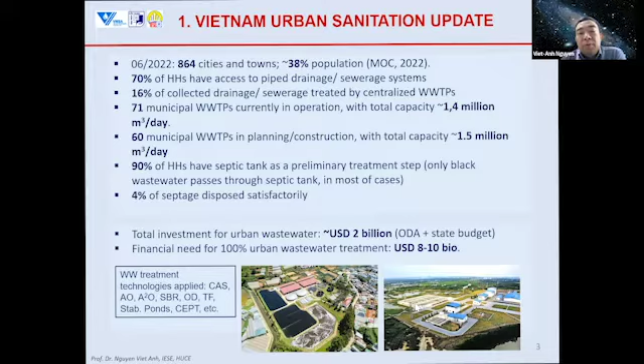There are different wastewater treatment plants in Vietnamese cities. Most systems are combined, except the sanitation systems in new urban areas and in some selected cities.

Combined and separate systems are very different in setting, and in the separate system, we can avoid septic tanks and eliminate the fecal sludge problem.

But in some urban areas, even new urban areas, people still have the custom of using septic tanks even in separate systems. There are some challenges in urban sanitation.

The key challenges are urban flooding, especially in this rainy season, sanitation coverage, and source of funding. Now we have less and less ODA for wastewater projects.

Cost recovery is a challenge, as in many other countries, especially developing countries. The household connection is a very important component, and it is being more and more considered, taking experience from the past. The last challenge is fecal sludge management.

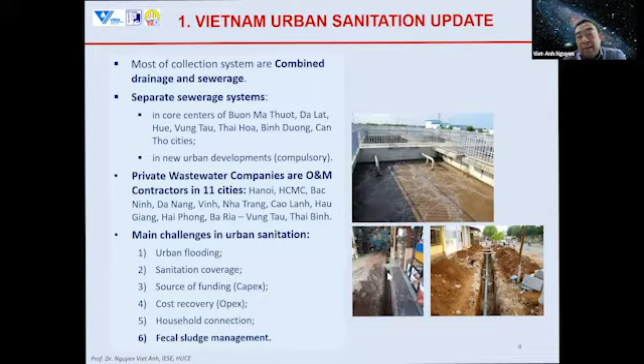This is a scheme of the combined sewage system in existing urban areas, where we have a septic tank receiving black wastewater, and from time to time we empty the tanks using vacuum trucks to the treatment site.

That is the combined sewage system. In the separate system, you see the connection directly, with sewer lines going to the sanitary waste.

Of course, we have to deal with every household, break the floor, and get wastewater to the junction box in front of the house.

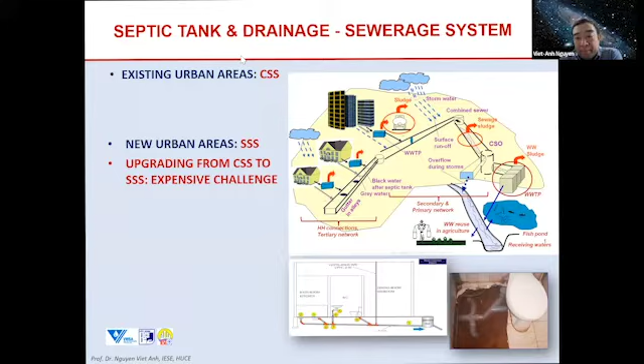This is an SFD for Hanoi City, where you see the red arrows showing a big value of untreated wastewater and fecal sludge dumped without treatment. This was done a few years ago, but the picture is still similar.

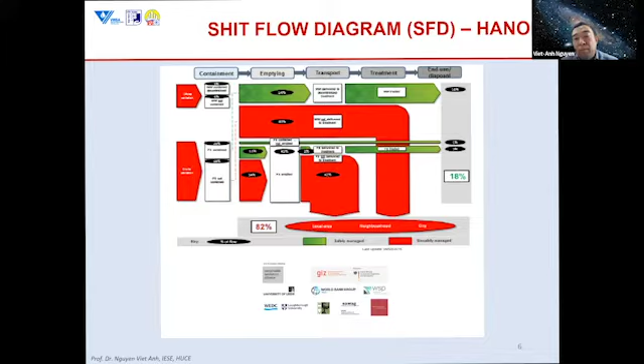So our mission is to make these red arrows smaller and to utilize the available resources from these lines.

Talking about the water and wastewater tariffs, we still have fairly low water tariffs, and wastewater tariff is only 10 to 25% of the water bill, covering only part of operation and maintenance expenditures. The rest should be subsidized by the city budget, and this affects fecal sludge activities in the cities.

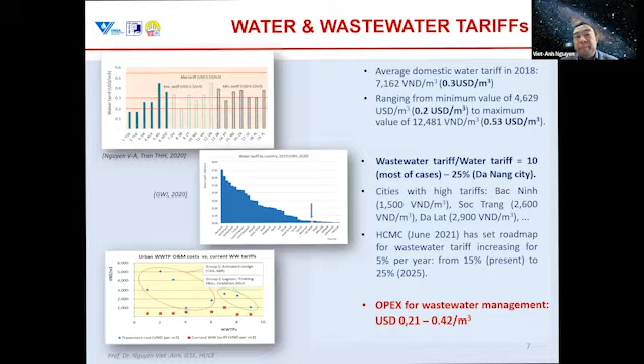Talking about the septic tank, the most common facility in urban areas. They can be made from bricks, plastics, FRP, or concrete; bricks and concrete are very common. Because space is very limited in cities, most septic tanks are built in the basement or behind the house where there is a garden.

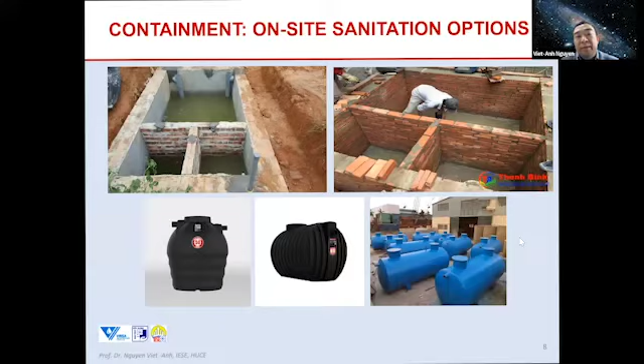We understand the legal framework for fecal sludge management is very important. In 2014, the government issued a decree on drainage, sewage, and wastewater treatment, with special articles on sludge and fecal sludge management that encourage resource recovery. The new environment law in 2020 also takes fecal sludge seriously, requiring it to be properly collected and treated, classifying it as hazardous waste.

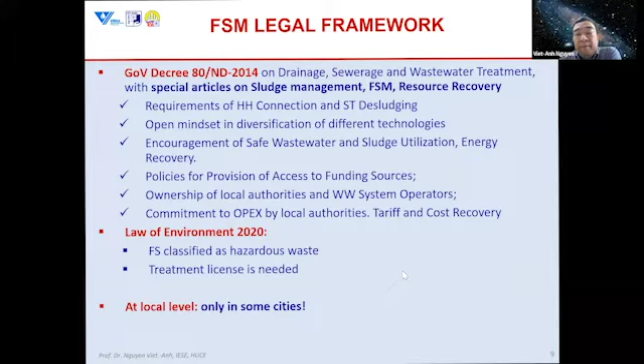For hazardous waste, only companies with a treatment license can provide this service. This is at the central level. At the local level, only some cities have local regulations specifically on fecal sludge management. I will mention that later.

For utilization, we have some technical standards setting requirements for the quality of compost product, including compost made from fecal sludge, regarding heavy metals and pathogens.

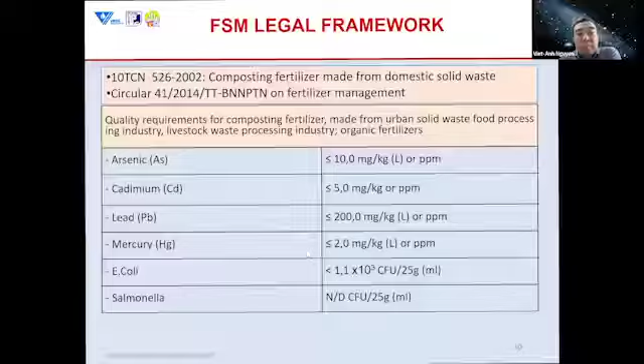Now there are some options we are applying for fecal sludge treatment. First is co-composting. This is a co-composting station in Hanoi, where solid waste from markets is brought to the station and fecal sludge is co-composted together. This is a product after maturation, used for industrial plantation.

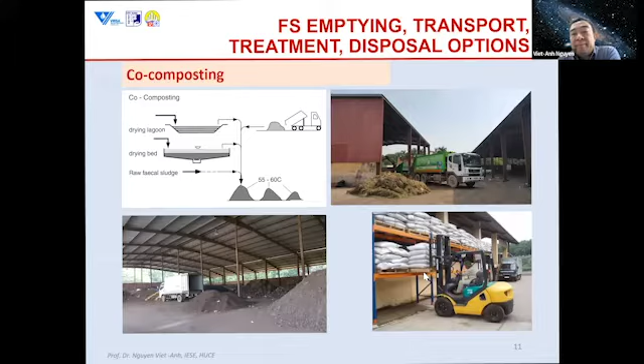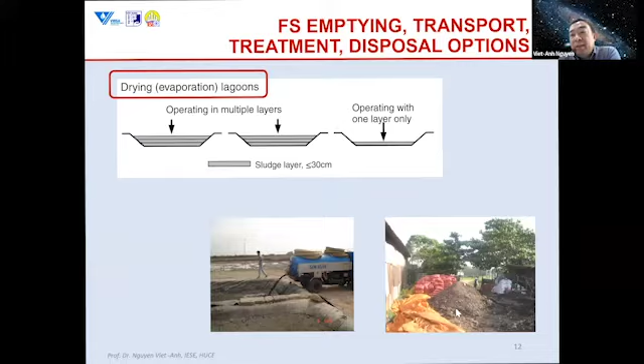The second option is drying lagoons. This is in Ho Chi Minh City, a private company that provides the service of emptying, transportation, and disposal. They rent land in the solid waste landfill complex, where they have drying lagoons, and the dry sludge is sent as material for composting.

Another option is drying beds. In most cases these are built together with wastewater or landfill projects. This is in Quang Ninh, near Hạ Long Bay, a drying bed especially built for fecal sludge, with a receiving station. These beds can also receive sludge from the nearby activated sludge plant.

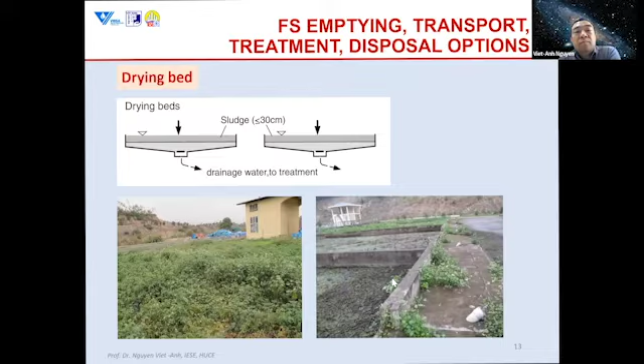In Haiphong City, we have a stabilization pond. After treatment in the stabilization ponds, the fecal sludge is mixed with organic waste again for composting. This station was built under a World Bank project about 15 years ago and is still under operation.

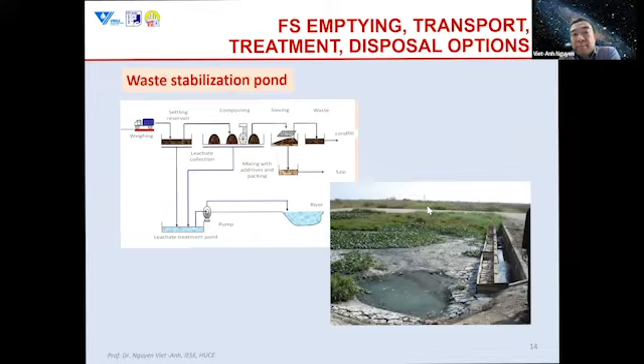We start to consider mechanical dewatering, besides conventional machines like filter press or screw dewatering machines. Now we have this multi-disc sludge dewatering machine, which works quite efficiently. This is dry sludge—because fecal sludge contains a lot of water and is difficult to dewater, you need to add a lot of cationic polymer, which increases cost, but you get less than 75% humidity, the water content in the dewatered sludge.

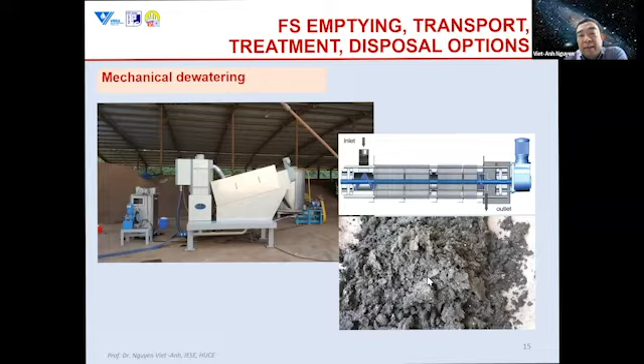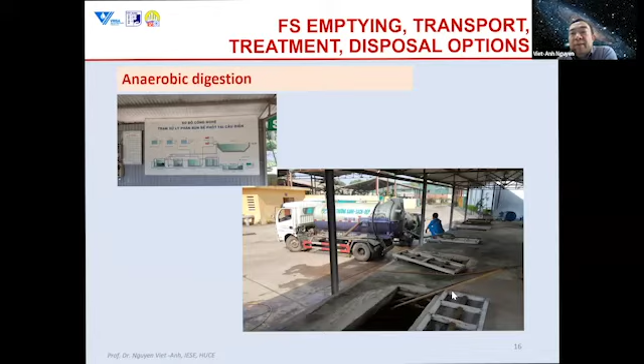Another option is anaerobic digestion. This is in Hanoi City, where septic tank sludge from public toilets is brought here by the city urban environment company, Urenco, and stored before being sent to the UASB. The liquid phase is further sent to the stabilization pond, and the solid phase is sent to co-composting.

In cities with wastewater treatment plants, fecal sludge can be treated together either with wastewater or with sludge generated from the sewage treatment plant. This is Buôn Mê Thuột and Đà Lạt city, where fecal sludge is brought into the receiving chamber, and in Buôn Mê Thuột it is treated together with wastewater.

The challenge for this option: even though it doesn't bring much organic loading to the wastewater treatment plant, it brings very high nitrogen ammonia loading. When septic tank sludge receives only black wastewater, there is very high nitrogen ammonia concentration in the fecal sludge, and if the sewage treatment plant cannot handle the nitrogen in the effluent, it cannot meet the standard. That is one challenge we have to be aware of.

In Buôn Mê Thuột city, they use waste stabilization ponds technology for wastewater treatment, and ponds have limited capacity for nitrogen removal. That's why in the second phase of the plant upgrading, they have to consider the AO process for better nitrogen removal. Similar situation in Đà Lạt city.

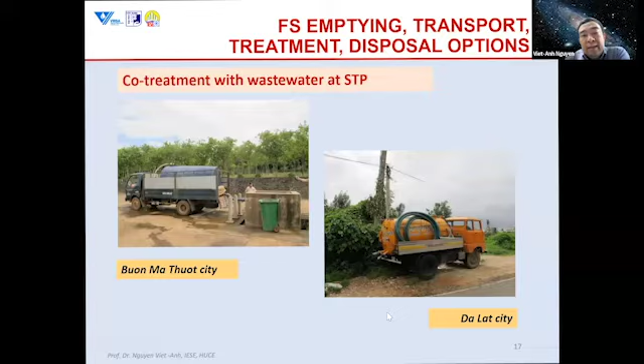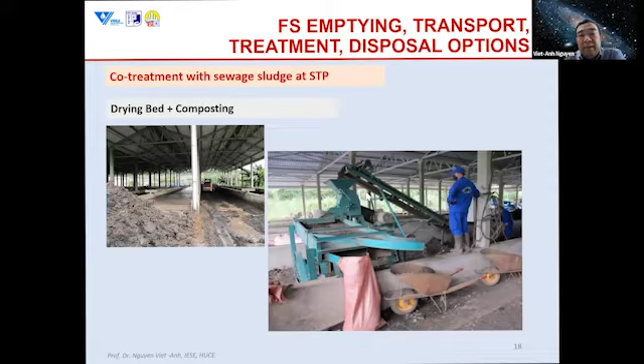In Đà Lạt city, this treatment plant can sell the co-compost product to the flower farms. There are a lot of flower farms, and there is a need in the market for fertilizer. We did a study a few years ago on the market demand to see how we can make use of a value chain in fecal sludge.

We conducted a study in some provinces: Sơn La, Bắc Ninh, and Bà Rịa Vũng Tàu, and found there are more than 10 options for utilization of nutrients from fecal sludge. But the most feasible options in these three studied cities are fertilizers, fuels for brick production, black soldier fly larva for aquaculture, and again, solid fuel for brick production.

So locally made brick workshops can receive the fecal sludge as fuel.

The treatment plant in Hanoi is under upgrading, and the city is calling the private sector to take part. The station will be upgraded from 50 to 500 cubic meters per day, which is pretty enough for the amount of fecal sludge generated from the city. Now it can handle only 10%.

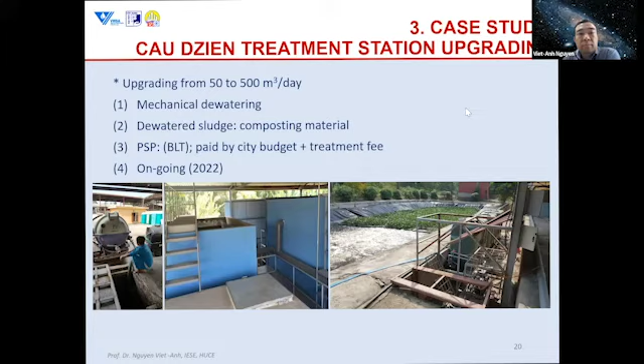This is an FSM project in Bến Tre carried out by East Meets West Foundation. This is a quite interesting project. The foundation works a lot with local authorities and involves a lot of stakeholders, including the city authority.

Also involved are the public utility urban environment company Urenco, and private firms for collection and transportation, the women's union who work with households on septic tank utilization, and working also directly with households.

The treatment station includes settling and drying beds mostly, and then leachate is sent to the treatment station. There are two special trucks, big and small, for fecal sludge collection in the city. This is the drying bed, and the leachate is treated here, and then sent to the waste stabilization pond.

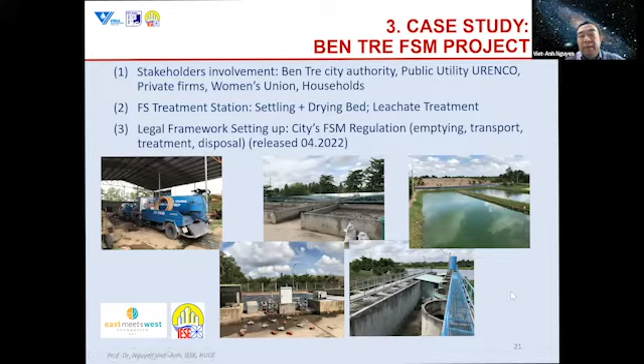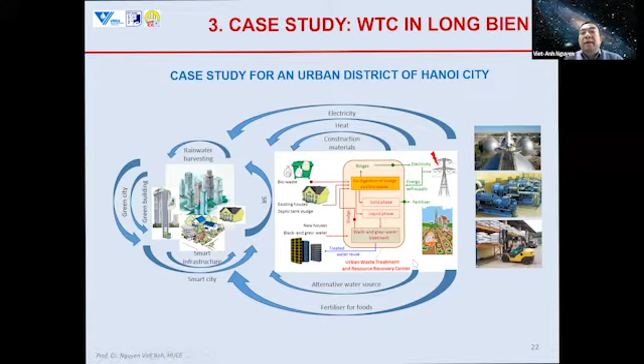Another recent study we did looked at the possibility to recover resources from integrated waste management in the city. We call it a green city, where bio-waste, septic tank sludge, and wastewater can be treated together at the integrated waste treatment station of the city, where recovered energy can be utilized, and wastewater and fertilizer and so on can be utilized for the city.

Our findings show that for one person per year, fecal sludge generated can create 1.5 kilowatt-hours. Besides wastewater, the embodied chemical energy can generate 15 kilowatt-hours per person, and organic waste 159 kilowatt-hours per person per year. We are not talking about heat, only about the electricity generation potential.

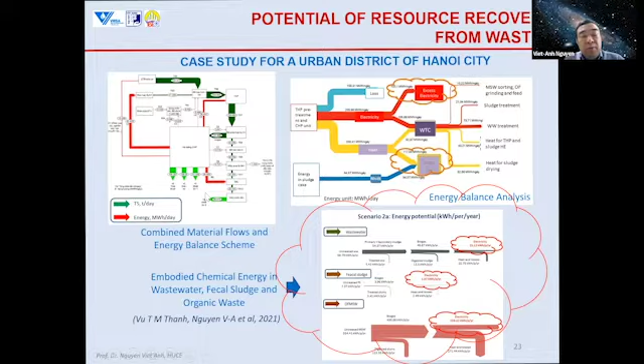On this, we took the case study of one district of Hanoi. So to come to the conclusion, I would like to highlight some points here. Besides the central level legal framework, we also need a local level, either provincial or city, FSM regulation.

It should include enforcement for regular desludging. Otherwise, the septic tank will lose its function, and the control of fees should be there, either public utility or private companies providing services, but the fee should be controlled.

Second, urban sanitation planning is needed, where the FSM component should be included. Third, for the stakeholders, we think the local public utility plays a very important role, and if they are working properly, it's easy to include the FSM component, and it's even much easier than to create a new utility or to create favorable conditions for the private sector to come in.

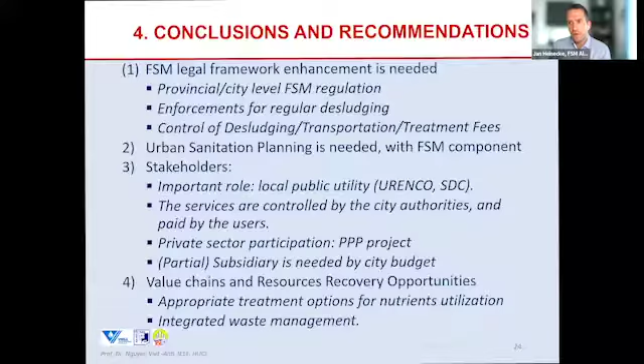We can now get to the Q&A. Thank you first of all for the very comprehensive presentation. There was really a lot in there, a very comprehensive overview covering lots of aspects. A lot was about treatment and reuse, and loads of interesting case studies that you presented and opportunities that there are. So the first question came from Paresh, already midway during your presentation. Paresh wanted to know about the quality control regime.

Okay, thank you for this good question. From the regulation, as I mentioned, the Ministry of Agriculture and Rural Development issued a technical standard for compost fertilizer that also covers fertilizer made from fecal sludge, where you have to meet the standards for heavy metals and pathogens like Salmonella and helminths, etc. That is a regulation. And for the leachate, we also have special effluent standards.

The control regime belongs to the Department of Natural Resources and Environment in the province. So each project should do regular monitoring every 3 months and then submit the report to the Department of Environment. And they also do checking from time to time. For the liquid phase, the control can be done easier. For the solid phase, the control is made less frequently. So only some big plants can do that, but in the small plants, the situation is worse, I would say.